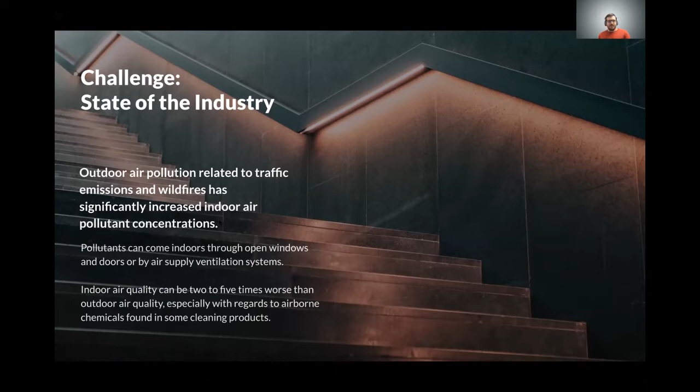We've got all that pollution outdoors that could even come indoors, infiltrating the home if it's not well sealed, or if you don't have advanced filtration and ventilation. So it's something to keep an eye on. But we also have a lot more sources indoors nowadays. There's certainly VOCs and ozone and cleaning products, and the lack of proper filtration tools on the order of HEPA, and fine particulates, which we've come to learn over the decades are particularly bad for human health and can exacerbate or even cause certain health conditions. So super important to pay attention to these. We'll dig into each of those.

We have both a residential and more of a commercial solution. What you can see there is our Awair Element. That's more of our residential unit, tabletop desk placement, plug it into the wall, connected to Wi-Fi. Super easy to get started in your journey of continuous monitoring and data collection. And I want to highlight these 5 particular air factors: temperature, relative humidity, carbon dioxide, total volatile organic compounds or TVOCs, and particulate matter 2.5 microns or less.

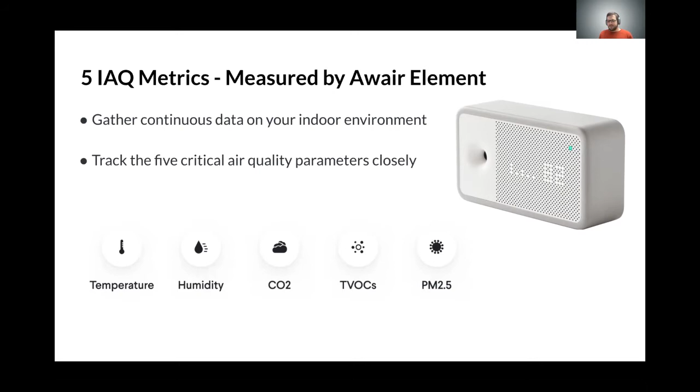Not all of them might initially strike you as an air quality or environmental quality metric. When you think about the outdoors, you've got things like AQI. But for the indoors, where we have more control over our environment and where we spend most of our time, about 90% of our day, if you spend more time outdoors, kudos to you. But especially over the past couple of years, we've been cooped up quite a bit indoors. So really all these factors influence our health, well-being, job performance, cognition, things like that we'll get into.

So looking at these different air factors and what are some recommended ranges there. We've got a more or less proprietary IAQ score that's essentially made up of these ranges, and it's geared towards nudging you back to those optimal readings for health, comfort, safety. On the temperature side of things, apologies for not including Fahrenheit there, but for the rest of the world, the Celsius, you're looking at the mid 60s up to the high 70s for that optimal. If it's too hot, we'll get into what happens when you get into more of those yellow, orange, and red zones, outside of that green optimal zone.

Relative humidity, it's roughly 40 to 50%. I think, depending on the certifications and other bodies of research, there might be a little bit wider gap there, from the 30s to about 60 or less.

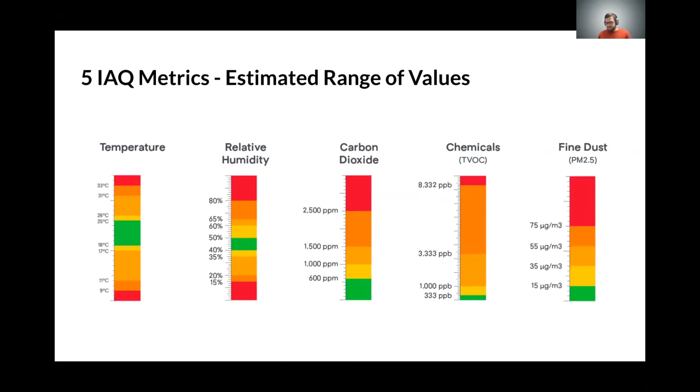Moving along. Now that I've talked about and hinted at some of the reasons why you might want to measure, let's dive into that a little bit more. Obviously, health and safety is even bigger. There's more awareness lately than, I'd say, in the past couple of decades, but especially in the last 2 years. We spend 90% of our time indoors. I think I saw that flu rates are astronomically lower than they've ever been before. It's partly because we're not commingling in indoor spaces as much. But with things like wearing masks and more ventilation in spaces, we're diluting the air, in those indoor spaces where we have more control to affect health outcomes.

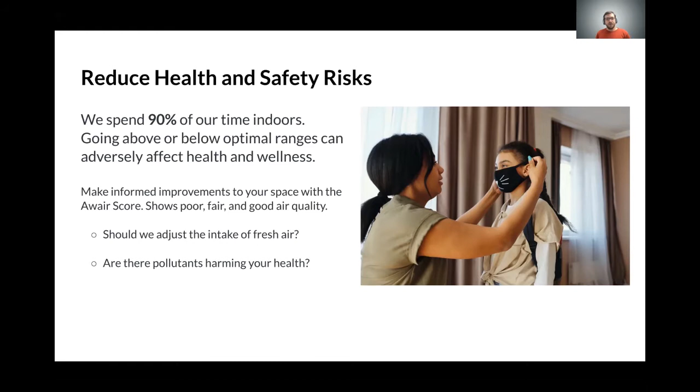So they're really strong indicators. That's why we've contributed to these better health outcomes by controlling fresh air intake and removing pollutants and contaminants from the air. And really, by monitoring these continuously and having historical data, we can unlock some of these secrets and point more to causation than purely correlation.

Another reason, and I ended with carbon dioxide in particular, is increasing productivity and comfort. Temperature and humidity also have effects on this, but Harvard and Joe Allen have done a lot of research into the effects of carbon dioxide on cognition and job performance, and it spills over into sleep and everything else.

If you crack that window, and I've seen this anecdotally so many times, even employees at Awair will remark, as soon as they get their device the first day they start, that by cracking the window and seeing their CO2 levels come down from what they used to be overnight, they've gotten better night's sleep. So the real immediate impacts of reducing CO2 are increased productivity and feeling fresher. CO2 is one of those things that creeps up on you, so you might not realize that you're feeling kind of woozy.

How many times have you come out of a conference room or a well-sealed room with the door closed and no ventilation, and walked away getting really tired, maybe call it an afternoon slump? It sneaks up on you, and so by monitoring it in real time, seeing those values and dialing them in through certain actions, you can really improve your livelihood.

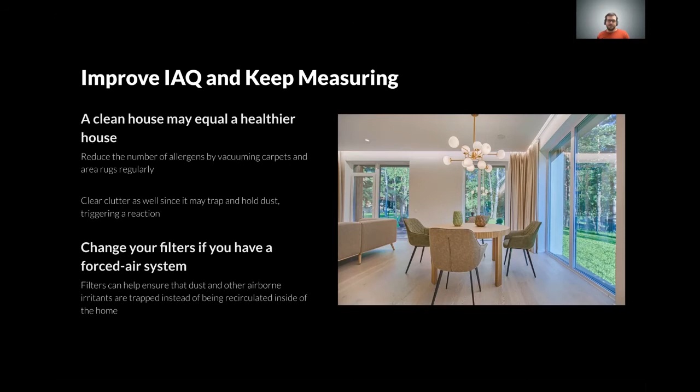I think we like to think as consumers that they're just trying to get more money from us, but there is a big impact of a dirty filter on the performance of your equipment. The more it gets clogged up and reduces the efficiency, the more that dust and contaminants linger in the air. So the cleaner that is, and the more air you've got moving, that's really good.

Keep going. So you want to look at, again, for folks like myself that don't have access to those whole home systems, maybe just heater and running through the HVAC filter. Natural ventilation is really great. Opening windows, or, as I mentioned, sleeping overnight, cracking the window a little bit, leaving the door open, letting CO2 diffuse throughout the entire space as opposed to concentrated in a closed off smaller room. You might be surprised how high CO2 gets in a bedroom in the middle of the night, especially a well-sealed home.

I think there are all sorts of new techniques and strategies on this. I was thinking at the beginning when Brett was talking about those silent, I think Panasonic, air handlers and things. I've got a bathroom exhaust that's extremely loud, so we don't leave it on all the time, but it would probably be great if we did. Same with the range hood. I don't know, maybe there's also a psychological thing there, like it must be working if it's really loud, moving a lot of air.

But there are things that you can do intermittently throughout the day, but you can only know when it's relevant to open up those windows without having other adverse effects, such as maybe you live in a humid environment, opening the window, letting all that humidity in, and that can cause other problems. So really, again, coming back to those 5 main air factors: temperature, humidity, carbon dioxide, TVOCs, and PM2.5, you want to measure some of them to treat certain aspects, but then you want to make sure by treating you're not causing more problems. And using a dehumidifier in more humid climates.

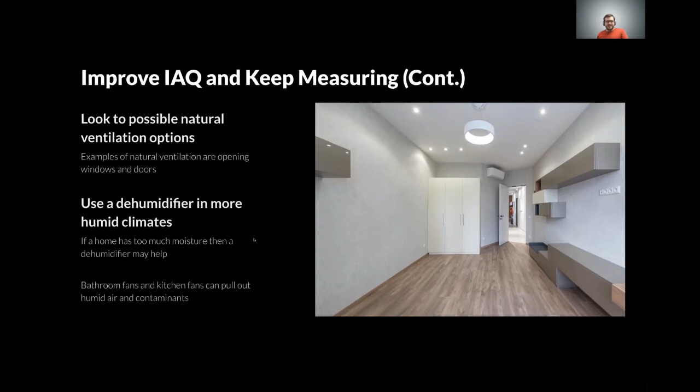I think we might even be coming up on the drier season indoors, although my Awair here personally says that I'm usually in the 60 to 70% humidity in San Francisco, even in the winter. Still trying to find strategies to deal with that one, but there are a lot of mechanical and natural ways of controlling humidity depending on outdoor and indoor circumstances in your region, just running those bathroom fans and kitchen fans, even from boiling water and whatever else may involve running water, can be good to flush that out. So a lot of strategies there. You could go on and on all day.

So I wanted to touch briefly on LEED. As I mentioned earlier, we'll come back around to that with Brett in a little more depth. If I understand correctly, there might be a lot of people here interested in LEED for homes, and maybe even multi-residential and office buildings, and they all have the need to monitor for air quality. There's a lot you can do with that information. I hope that I've called out the importance and how and why. The strategies might be slightly different, but air quality affects all of us. Kudos to everybody going above and beyond with LEED for homes. My hat's really off to you.

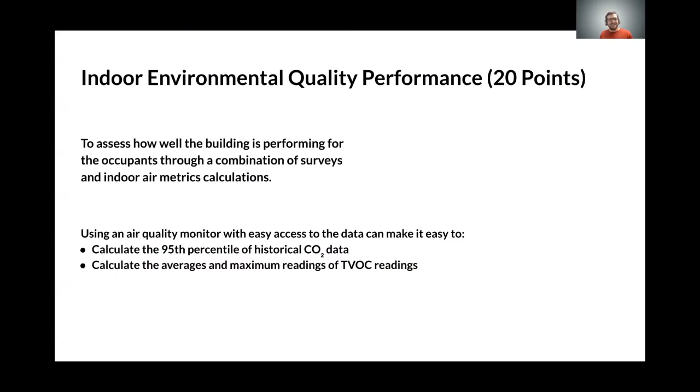So there's one section around indoor environmental quality performance and surveys of occupants and data reports. Make sure to find an air quality monitor with easy access to data, which will make that reporting really easy. So things like calculating the 95th percentile of CO2 data, calculating averages, and looking at the maximum readings for TVOCs can be helpful there. For enhanced indoor air quality strategies, there are a couple of points there, but I just wanted to highlight that there are some things continuous, real-time monitoring might not directly help with or get you those points, but it can definitely give you some context and supply more information so that you're better equipped to get these points.

And so for strategy 2, 3, 5, and 6, what does it mean to have increased filtration, ventilation, preventing cross contamination between rooms? Through continuous monitoring of these 5 different air factors, you can see some of these effects at play in real time and adjust accordingly, or see whether you're doing enough, so that when you have those more in-depth analyses and studies, or experts who come out, you're not wasting their time, you're not wasting your time, you're all prepared. And then more directly, there's carbon dioxide monitoring, which we talked a lot about, and additional source control monitoring of those pollutants indoors that are contributing to poor air quality.

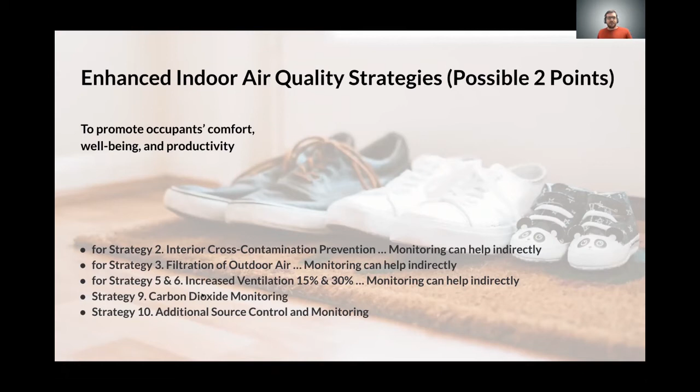And then even on contaminant control, again, a couple of points possible there, and might not be directly relevant, but when you do a flush of the building, it's fascinating to look at the data and see, okay, this is really effective. And I know a lot of commercial clients will go in yearly or even quarterly and do a flush, like a reset essentially of the building, even though option 3 here might be geared towards pre-occupancy.

Again, as you're more aware of the issues, there might be some of these strategies you might want to perform on an ongoing basis, to just help with overall health and wellness. And then air testing again: are you prepared? For option 4, do you know your baseline, so when you come and sample and do the professional testing, you're prepared for that.

Cool. So yeah, covered a lot of information, and I could go on forever. Look forward to any questions, and I know Brett's going to cover the LEED in a little more depth. So yeah, thank you.

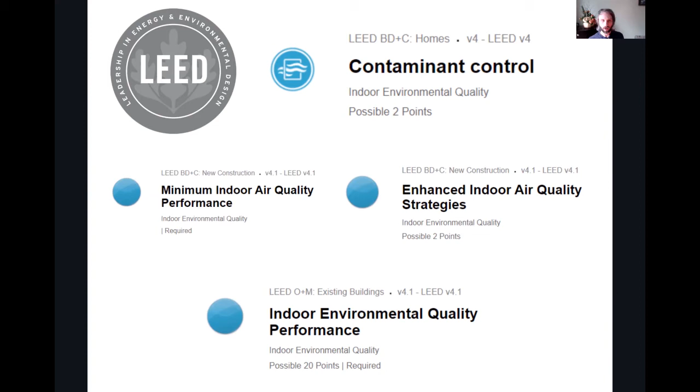So let's take first a look at LEED NC, the requirement. There's a lot to this requirement. We're not going to get into it about basic air quality management. And there's some differences if you have residential units too, which we don't see often unless it's a huge high-rise building. But there's a lot here. You can check it out on the LEED credit library.

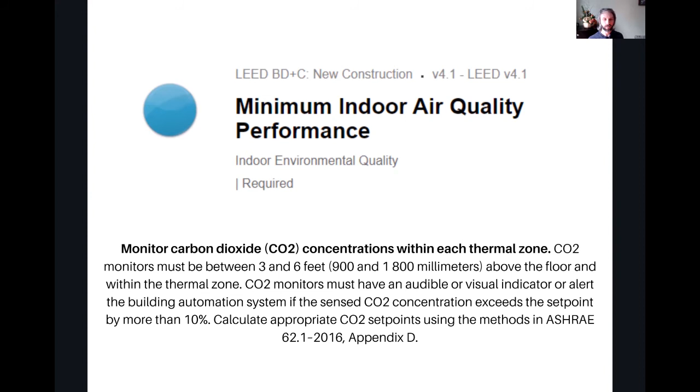But specifically what I want to point out here is placing a monitoring system such as this into the thermal zone, or what a lot call the breathing zone between 3 to 6 feet, and then being able to have it communicate just like this does. It communicates out a score. It sends an update to the phone or to some sort of building management system that there's a problem, that CO2 levels are being exceeded. So that's very important. There's a lot to this requirement, but that's one part where you can use a device like this to achieve that.

Now, if you want to get bonus points with this device, there are some different strategies you can use, and there's a lot to pick from here. But if you're taking the air quality monitoring strategy, what you're looking at here is the ability to monitor that CO2 within this. And then below that, you can see strategy 10. You might think through what other things are going on in this building that we should be monitoring. So if you have a restaurant or an area with a lot of cooking, you might say, well, cooking is going to give off PM2.5.

Even if you're using electric, I can tell you from personal experience that you are going to burn something no matter how hard you try not to, and it's going to elevate to high levels of concerning PM 2.5. Even if you're electric, and we encourage all electric, it's going to reduce the amount of PM 2.5, but either way, that's one thing. Or you might say even VOCs; all spaces are going to be impacted by VOCs. So those are things you can be looking at. It looks like you get to pick here under strategy 10.

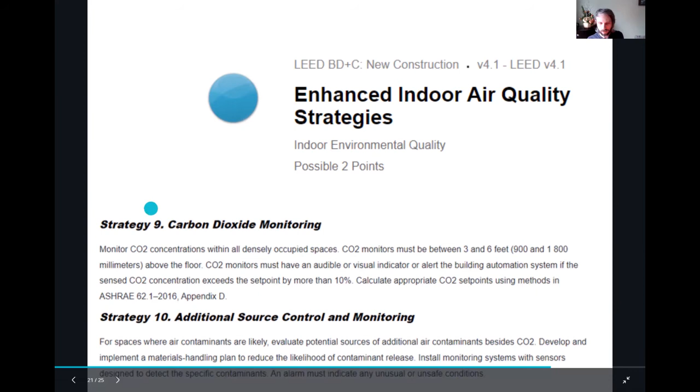And then moving on, LEED operations and maintenance. So this is the existing. So you could take basically any existing multifamily building or commercial building, and we can certify it under LEED. We can score it out to see how sustainable it is. It's important. And air quality has to be monitored. So there's a couple things going on here in this one.

But the thing about it is you have to monitor these and survey them, or even take a one-time snapshot with an industrial hygienist. But your score is based on your CO2 and your TVOC and your occupant satisfaction survey. So what's important about that is these real-time monitoring devices are going to give you that CO2. They're going to give you that TVOC for your occupants, for your clients, for the homeowners in the units, constantly. So there's no surprises when you go to submit for LEED certification. You'll have it. It's not like a snapshot.

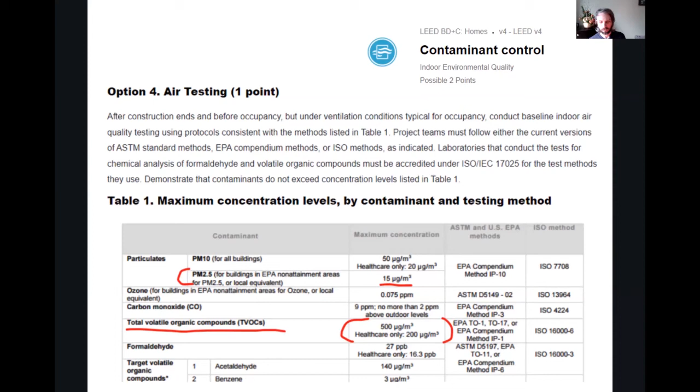It has to have an air quality monitoring system in place that's working and probably certified to the RESET standard, which limits it to a very select few. So I'm making that announcement here publicly. And then hopefully when we launch the updated version, you will see that in place. Many of our builders and architects who are working with us are already putting these things in place. So that's easy enough. So that's enough on LEED.

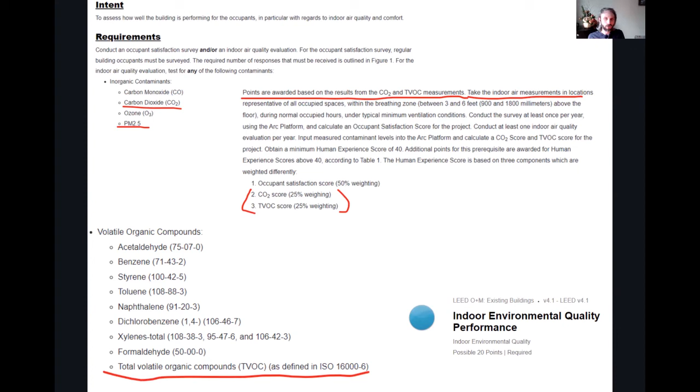And I know there's even more than this, there's a lot. Formaldehyde's a big one, right? A lot of people ask me, how do I know what's going on with formaldehyde in my house? So how close are we, Dean, to being able to look at these other VOCs, molds, mildews in the air and be able to make informed decisions? Yeah.

This space is rapidly evolving. Even in the past 4 or so years that I've been with Awair, the number of new sensors from suppliers all over the world, the technologies they're using to build those sensors, algorithms and sensitivities and everything else, I said to somebody recently, we're in the golden age of indoor air quality monitoring, or right at the cusp of it, because the advances over the next year, 2 years, 5 years are going to start rapidly accelerating.

So I would not be surprised to see a lot of those particular VOCs become part of commonplace continuous monitoring. We've got a laundry list on our website and manuals for our devices of the ones they are sensitive to. It doesn't mean you'll see them in every space, but it doesn't make them any less important to understand if they're there or not, because if you don't do either that lab grade or continuous monitoring study and collection of data, how are you going to know? You could be the 0.001% of homes that's got something in it, or a building material that was put in there.

And as you see the technology evolve, we can see things there that you didn't even know existed before. Again, PM 2.5, for example. When Awair started, we had just an aggregate dust sensor, and now there are more suppliers out there, getting down to even finer particles and larger particles, the whole spectrum of particles, because different sizes of particles can correlate with certain things. Coming back to mold, it fits into a specific range, and viruses fit into a specific range.

And besides just measuring sizes and concentrations of these particles, I've seen some cutting edge research and development around testing something like a breathalyzer for COVID. So you can monitor in real time for very specific viruses. This stuff's probably much further out, or would be extremely cost prohibitive to put into every space. But it just goes to show, this is crazy where we're headed.